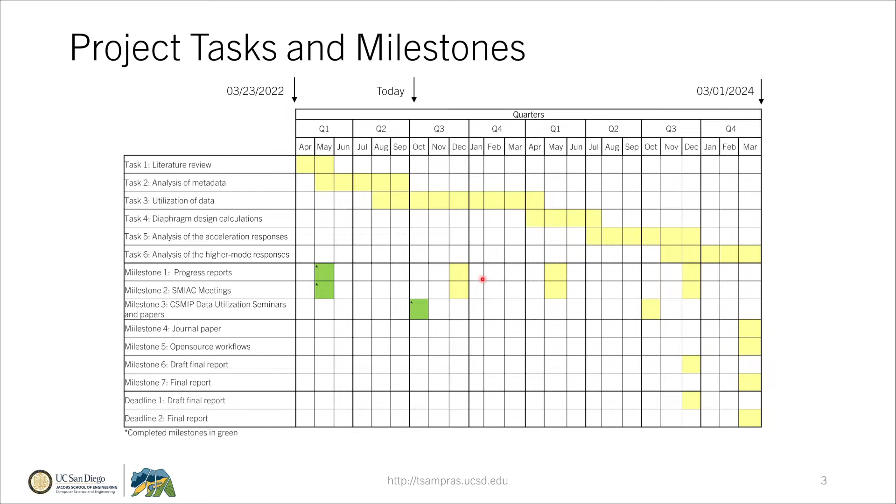We started working on this project on March 23rd, and in the past six months we have met with the building subcommittee. We submitted the report, received comments, and considered those, which I'll discuss as well. Today I'll give you an update on this ongoing project; all the conclusions are not final.

A little bit about the motivation: in conventional buildings, we expect the seismic-induced horizontal forces developing at the floor diaphragm level to be transferred through a seismic force-resisting system to the base of the building. Here I show an example, a structural wall building, where we expect to limit the first mode response by the formation of an inelastic flexural mechanism at the base. There is no way by design to limit the higher mode responses.

Here I show a well-detailed connection between a flat slab and a core wall, where these number 9 bars are essentially collecting the seismic-induced inertial forces developing within the diaphragm and transferring them into the plane of the wall. We typically design these connections to remain linear elastic and don't anticipate dissipating seismic energy there. However, during strong motions, due to displacement compatibility between the floor diaphragms and the walls or other structural systems, we should expect some damage.

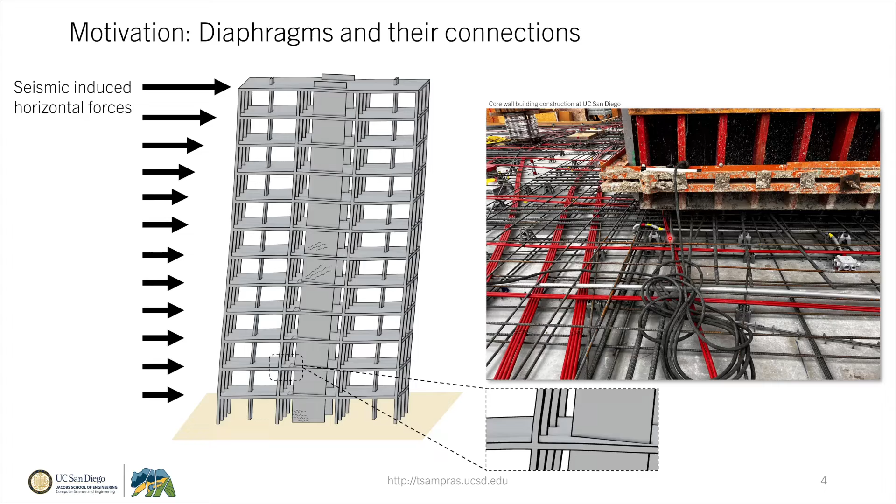In fact, this damage may even lead to total or partial collapse. Past earthquakes have shown structures like precast parking structures collapsed during the 1994 Northridge earthquake, or tilt-up wall buildings. More recently, in the 2010-2011 Christchurch earthquake, we observed collapses related to failures in the load path that transfers seismic-induced forces from the diaphragms to the seismic force-resisting systems.

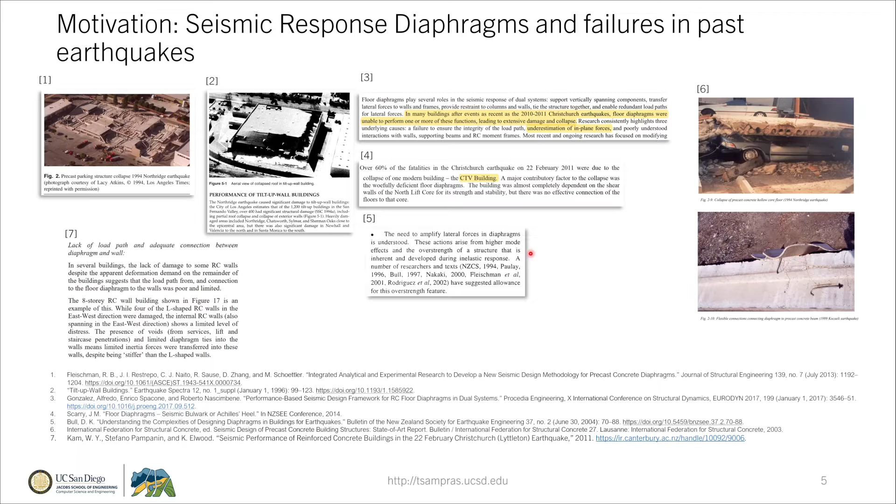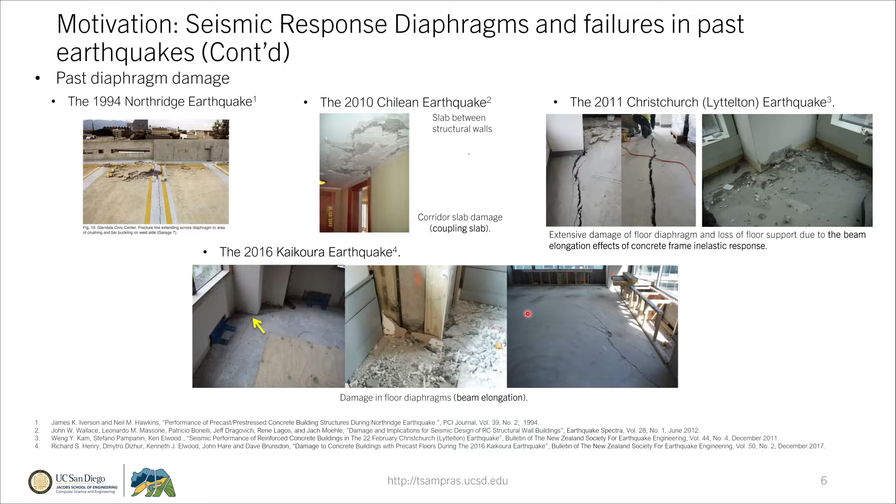These issues have been known in New Zealand for a long time, and researchers and practitioners have been working to solve them, especially how to quantify these forces developing in diaphragms and account for higher mode effects. This is not only related to collapse; the issue is also related to localized damage at the connection between the floors and other structural members.

As Brad mentioned, ASCE 7-16 and also ASCE 7-22 include an alternative method to design diaphragms, allowing us to take into account the second and higher mode responses that contribute to the total dynamic response of a building. This method was developed considering experimental results and numerical simulations. There is an opportunity to further validate this method, which is already an improvement, by utilizing the data available in the strong motion dataset.

I want to show a little bit about the database we have. There are several buildings that are actively monitored, and we already have available metadata associated with the type of building, the type of seismic force-resisting system, how many channels or accelerometers are installed in the building, and so on.

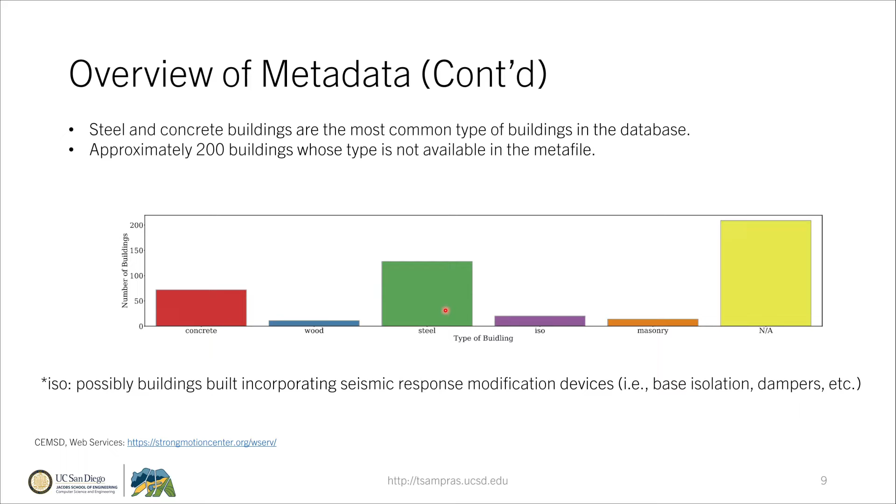Looking at the metadata, we can understand that the majority of the buildings are reinforced concrete and steel buildings, and the majority are between 2 to 5 or 6 stories high. Within this metadata, peak floor accelerations and peak ground accelerations are provided, so someone could quickly assess the amplification effects for each building that is actively monitored.

So at this point, we can say that we can utilize this information to further validate the seismic design provisions that were introduced in ASCE 7-16. And I want to take some time to describe briefly what these provisions are.

Essentially, they give us a tool to compute the seismic-induced diaphragm design forces, FPX, by utilizing the tributary weight at each floor level and the design acceleration coefficient CPX. The multiplication of the two results in an estimate of the seismic-induced horizontal forces, which is reduced by taking into account a reduction factor that considers the global ductility of the diaphragm system.

If we look deeper into this process, essentially we need to determine the seismic force resisting system that we will be designing, the building location and soil class, the risk category, and the number of stories. Then we can estimate the natural period, the fundamental period of the structure, and compute other parameters like the design acceleration coefficients, the modal participation factors, and eventually the design acceleration coefficients for diaphragms.

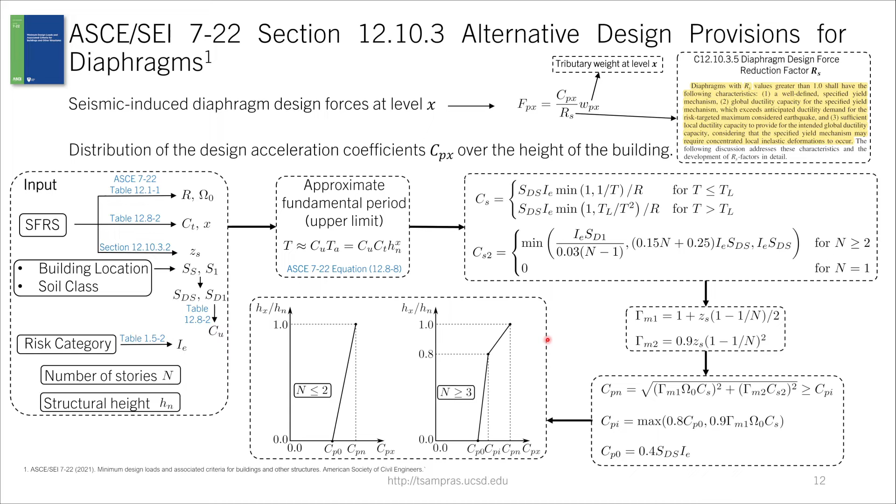On the upper 20%, we have a steeper linear variation that demonstrates this method does take into account the contribution of second and higher mode responses, which effectively affect mostly the upper 20% of the structure.

Now I want to start looking into some of the parameters used to compute this design acceleration coefficient for diaphragms, which will help us also select some criteria to establish the set of buildings that we will be using to do this validation within our workflow.

So first I want to look into the number of stories, which essentially will affect the fundamental period of the structure. As the number of stories increase, the period increases, and this will affect also our design spectral accelerations and the modal participation factors.

As you see here, if we plot the design acceleration coefficient with respect to the normalized height of the building, as we increase the number of stories, the design acceleration coefficients generally decrease, and they reach a lower limit here.

This is actually expected, because as we increase the number of stories, the period increases, so these design spectral accelerations do decrease, and their variation also decreases within that larger period range.

So this is expected. However, one thing worth noticing is that in the upper 20% of the height of the building, we still observe a significant amplification of the design acceleration coefficients, and this is because the higher mode responses are still significant.

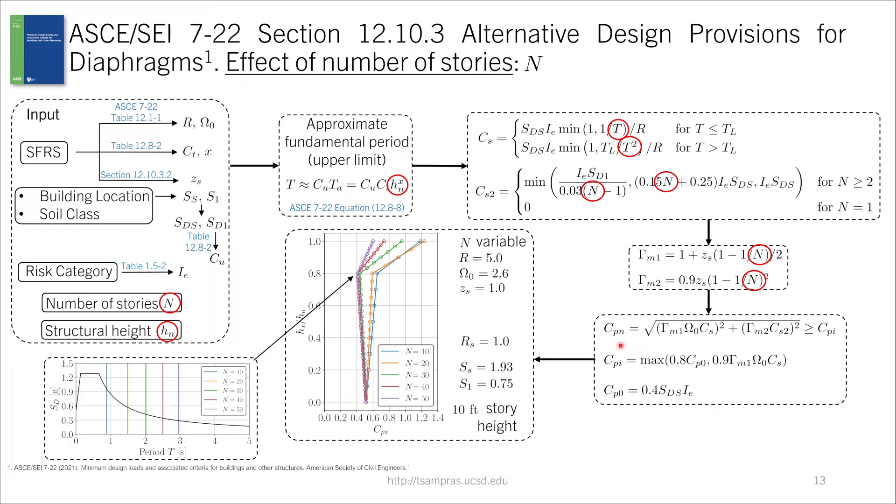Now, if we look at parameters associated primarily with the seismic force resisting system, we can focus on the seismic response modification factor and the overstrength factor. These are both parameters that affect the first mode response of the building.

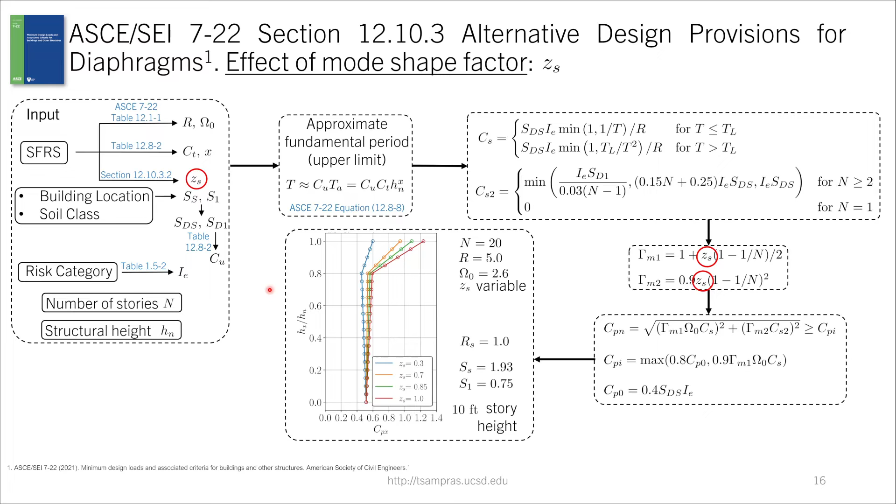Last, I want to look into the mode shape factor, which essentially tries to take into account how effective a seismic force resisting system is at reducing the second and higher mode contribution in the total dynamic response of the building. Here you can see that for a mode shape factor equal to 0.3, the distribution of design acceleration coefficients is fairly constant.

So we don't get significant amplification of the design acceleration coefficient in the upper 20%. This reflects that a building that uses, let's say, a buckling-restrained brace frame as the seismic force resisting system is able to mitigate the higher mode responses.

So all these things are reflected within this design code, and that makes it a very improved method in order to estimate the seismic design forces in floor diaphragms.

So having these parameters in mind, we can broaden our horizon and look at the criteria we need to take into account while selecting buildings for our validation. Related to the structural response of buildings is obviously the date of construction, because that determines the structural detailing and design criteria selected at that time. The number of stories also matters.

This determines the seismic response, the location, the seismic risk category, and the seismic force resisting system. There are some additional criteria, like how many channels or accelerometers we have installed in the building, and what is the spatial distribution of these channels. Do we have enough sensors within a floor plan, and are they well distributed over the height?

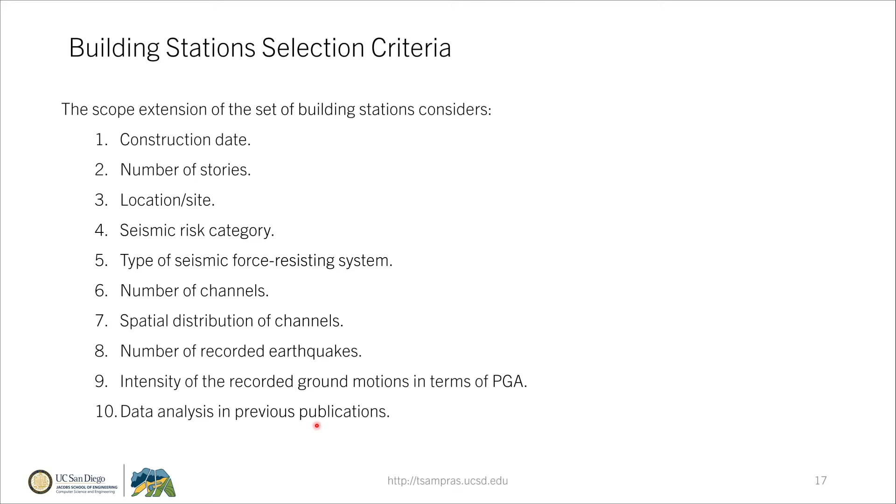The number of recorded earthquakes and their intensity at a building station is also important, because we would like building stations with a larger number of earthquakes occurring during the period the building was instrumented, and buildings that have seen earthquakes resulting in significant peak floor accelerations. Lastly, it would be nice to work with buildings previously studied, because that enhances the available metadata we can work with, and considering the long history of the seismic instrumentation program, this is something we need to take into account.

So for this preliminary study, up to this point, over the past 6 months, we were able to come up with a subset of building stations and seismic events. The criteria we selected for now were buildings taller than 12 stories, with maximum peak floor acceleration greater than 0.2g, and belonging within the California Geological Survey network, because this network typically provides more metadata related to the buildings. This resulted in 14 building stations, each of which may have more than one seismic event meeting our requirements, so we have essentially 20 unique combinations of building stations with seismic events. We call them analysis cases, and they are listed here.

As part of this project, we eventually hope to extend the scope and include more buildings with different numbers of stories, in order to better understand how the actual response of buildings compares with the design provisions. So having a subset of buildings led to the next step: developing a framework to do all the computations required in the study.

We decided to use Python, an open source programming language, to develop this framework. The first module in this framework allows us to compute the design acceleration coefficients. Essentially, we took the data and metadata already included in the strong motion database that is publicly available, and we tried to identify the parameters associated with the design procedure and append these parameters within the existing database.

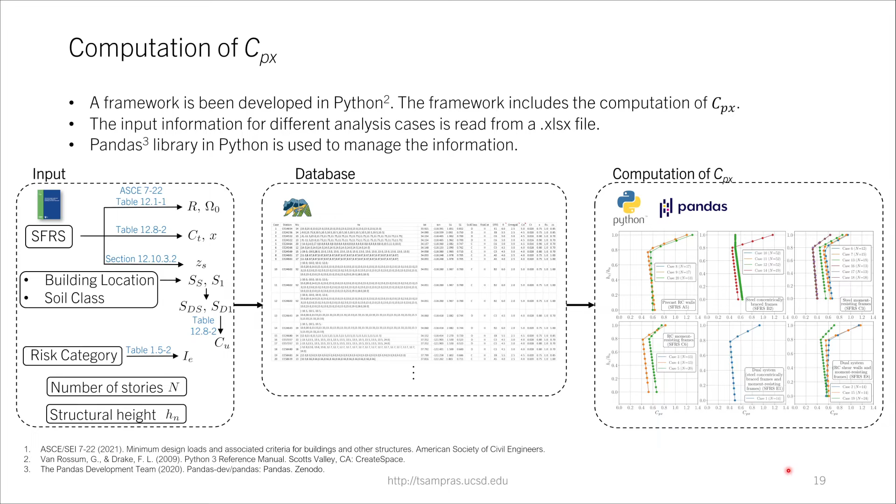Having done that, we can develop a module to perform the computation of the design acceleration coefficients for all the building stations included in the database. This is an example of a plot associated with these computations. Now, having the design acceleration coefficients solves one part of our procedure.

The other part, obviously, is the response of the selected building subjected to given earthquakes. In our study up to this point, we decided to compare the design acceleration coefficient CPX with peak floor horizontal translational accelerations. That means we needed to compute a relatively accurate estimate of the location of the center of rigidity, in order to decompose the horizontal translational components of the acceleration from the torsional components.

The location of the center of rigidity in a structure depends on the distribution of the vertical elements of the seismic force resisting system, but also depends on the intensity of the ground motion the building has been subjected to in the past, because some nonlinearity may result in differences in the location over time.

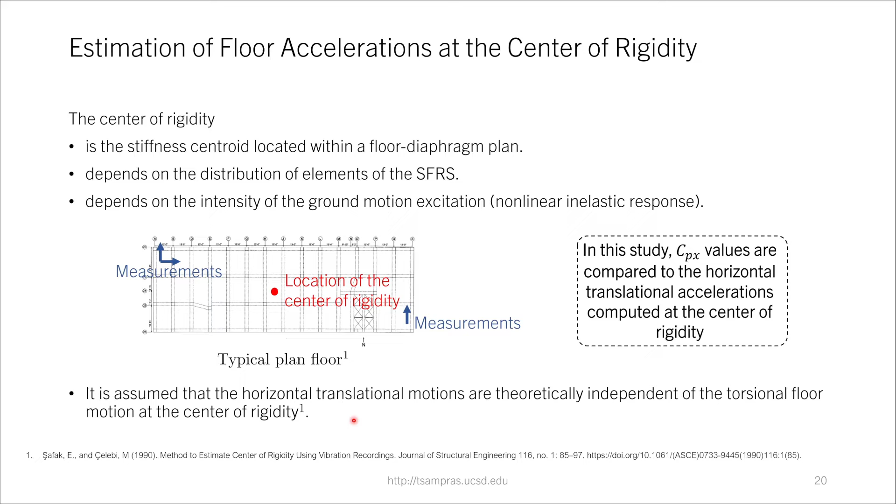So that meant we needed a way within our workflow to compute the location of the center of rigidity. We looked in the literature and found that Safak and Celebi published a paper in the Journal of Structural Engineering where they estimate the center of rigidity using acceleration data. The main assumption was that at the center of rigidity, the horizontal translational motions are independent from the torsional motions. I'll spend a little time describing this procedure developed by Safak and Celebi, which we used in our workflow.

Essentially, this method requires at least 3 measurements of motion at 2 different locations. For instance, in this schematic, P and Q are the two locations. We have a recording of motion in the X global direction and Y global direction at point P, and a motion recorded in the Y global direction at point Q. With that, Safak and Celebi expressed the rigid body translations in the X and Y directions and the torsional rigid body motion.

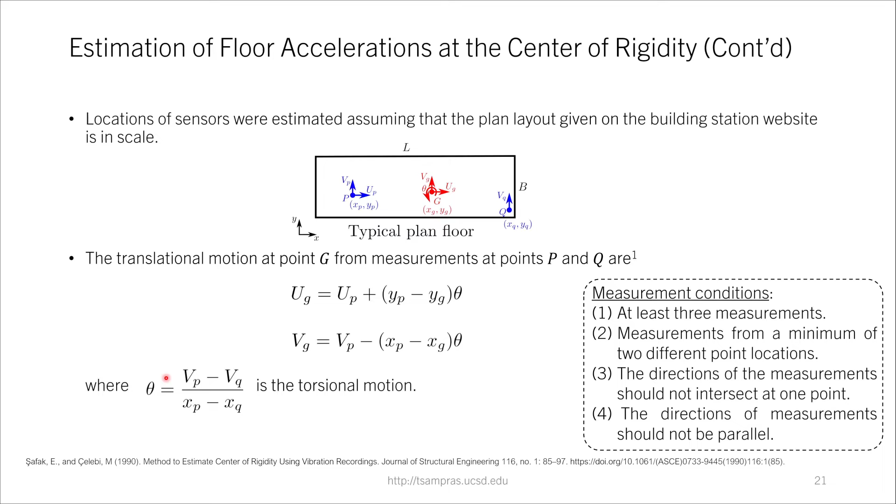Now, the next step is to compute the best estimate of the center of rigidity. In this paper, you can find that statistically you can use the cross-correlation between the horizontal translation along the x-axis with respect to the torsional rigid body motion. This cross-correlation has to be 0 in order to get an estimate of the x-coordinate of the center of rigidity. The same applies for the y-coordinate, where the cross-correlation of the y rigid body motion with respect to the torsional response has to be 0.

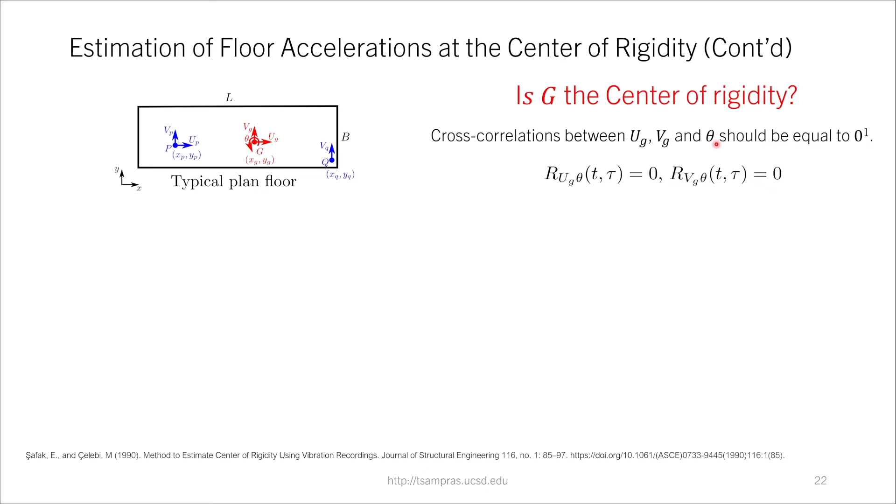However, Safak and Celebi stated that this is rarely possible when working with real data. So they propose that instead of setting these to 0, we try to minimize these functions. If we want to work in the frequency domain, they stated we can use the coherence function, which is basically another statistic metric in the frequency domain. To eliminate the issue of different frequencies, they propose minimizing the area under the coherence function, which is the integration over the whole frequency range.

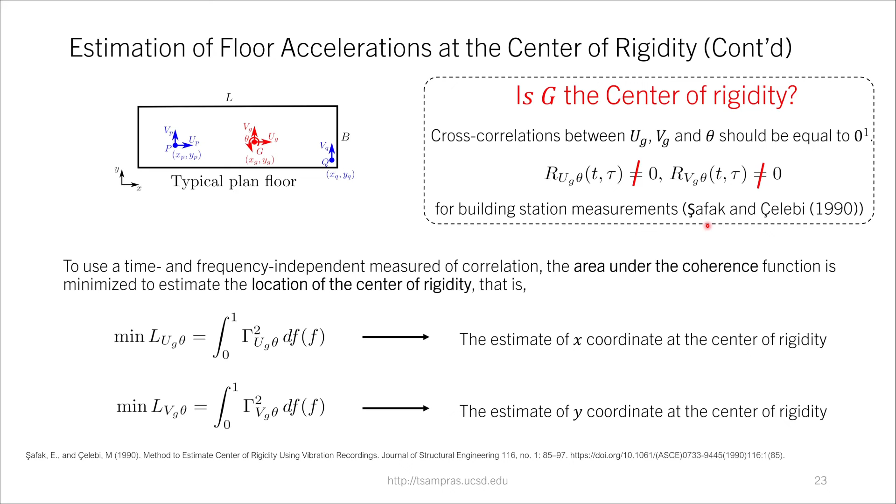This method gives us an approximate estimate of the x and y coordinate at each floor level where we have enough information in a building. So we took that method, and after validating it with information provided by Dr. Celebi and his colleagues, we implemented it within our workflow.

So we started again from where we left off, with our database from the strong motion instrumentation program plus the information related to the design acceleration coefficient. Then there's a module where we compute the estimate of the center of rigidity, and we expand this information into our existing database.

This information more specifically includes the X and Y estimates of the center of rigidity for each floor where we have enough information, and for each ground motion, because, as we said, the center of rigidity may change with respect to the ground motion we have.

That allows us to do a comparison by having the horizontal translational accelerations over the height of the building and comparing them with the design acceleration coefficients. This also gives us the opportunity to look at the torsional response independently and the superposition of the two, which is something we're interested in doing in the future as part of the higher mode effects.

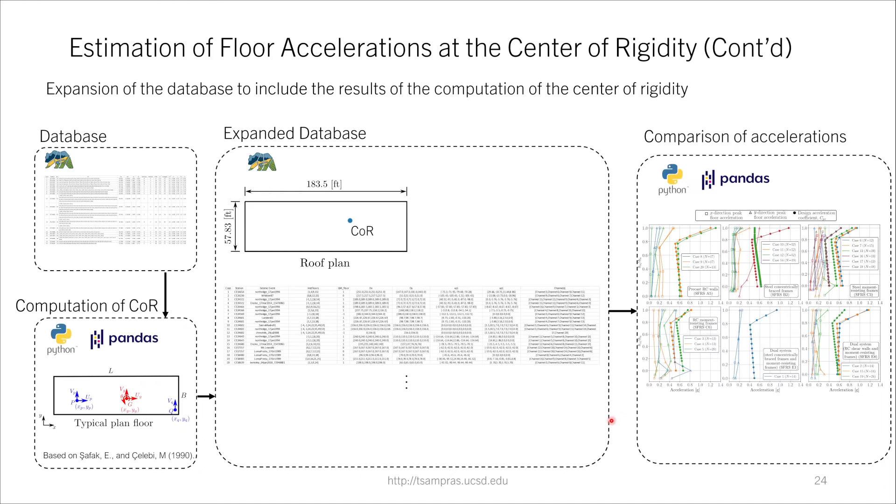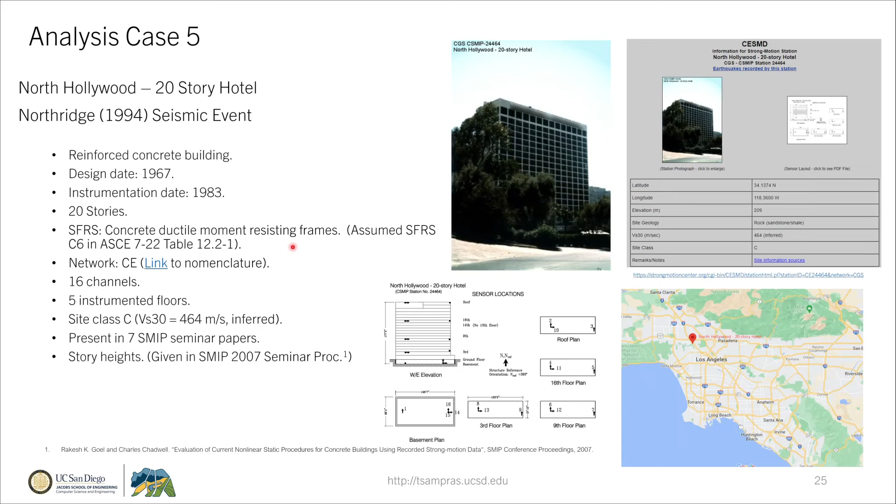I want to show two examples of implementing this procedure. Analysis case 5 involves a 20-story building subjected to the Northridge 1994 earthquake. This is a concrete ductile moment-resisting frame. You can see that by computing the coherence area, we can find where it's minimized and get the best estimate for the x-coordinate of the center of rigidity.

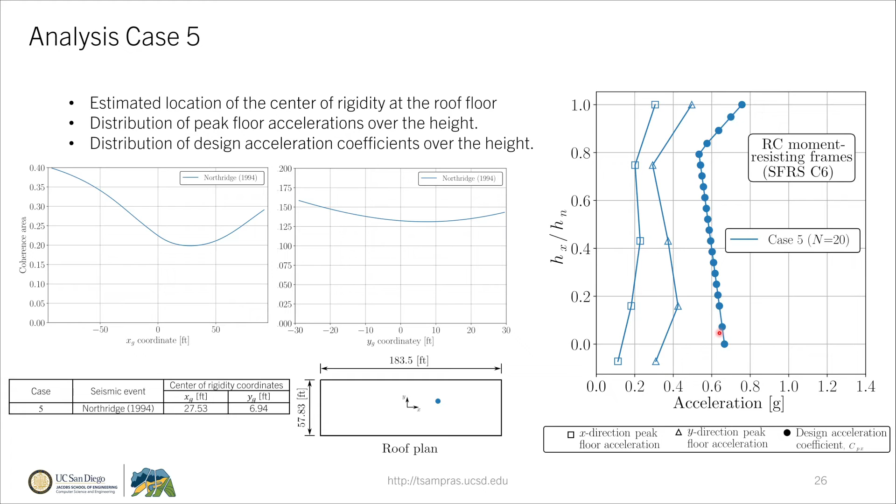We can do the same for the y-coordinate, and then decompose the accelerations and compute the peak floor accelerations over the height in the x and y directions, comparing them with the design acceleration coefficients.

Another example is analysis cases 10, 11, and 12, a 52-story building subjected to 3 ground motions. We assume this is a concentrically braced frame.

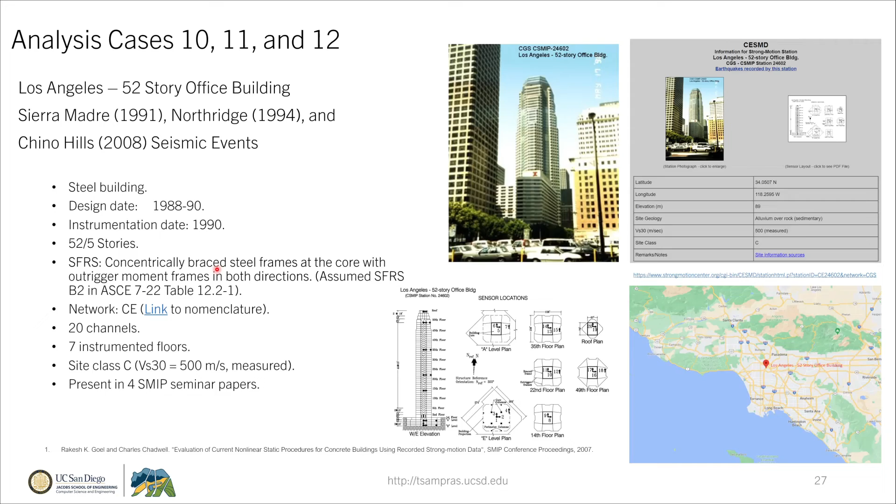The interesting thing here is that with this method, you may observe some variations in the best estimate of the center of rigidity. For instance, the Sierra Madre earthquake data resulted in an x-coordinate position different from the computation using the other two earthquakes, which may imply some small nonlinearity that occurred during the Sierra Madre earthquake.

Having this workflow so far, we're able to run the computation through all the buildings within the subset, which we're planning to expand later, and make a comparison.

These three analysis cases are special in that they include buildings with potentially vertical irregularities. ASCE 7, in the commentary, states that buildings with vertical irregularities must have special treatment and more sophisticated analysis to get a best estimate of the design forces for the diaphragms. So this is consistent so far with what we've seen in this very early study.

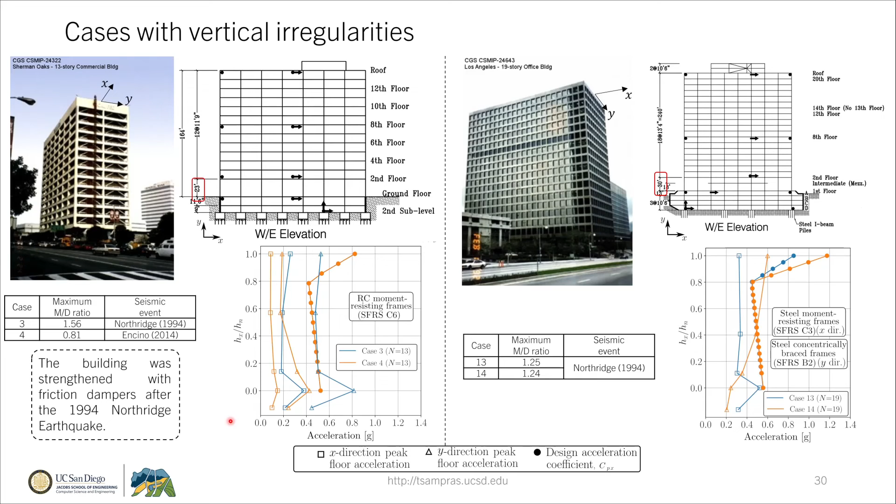I want to summarize by saying we've been developing this workflow, and so far we have a way to compute the design acceleration coefficients and the decomposed peak floor accelerations in the horizontal, translational, and torsional modes.

And we haven't found yet a building that has been instrumented and subjected to relatively strong motions that has exceeded the design coefficients, except for those buildings that have vertical irregularities. In the future, we will try to expand the number of buildings to account for more floors and types of seismic force resisting systems.

Also, based on suggestions from the meetings that we had with the building subcommittee, we will look into comparing the design forces coming from the previously existing design method, which is based on section 12.10.1, that does not take into account the higher mode effects.

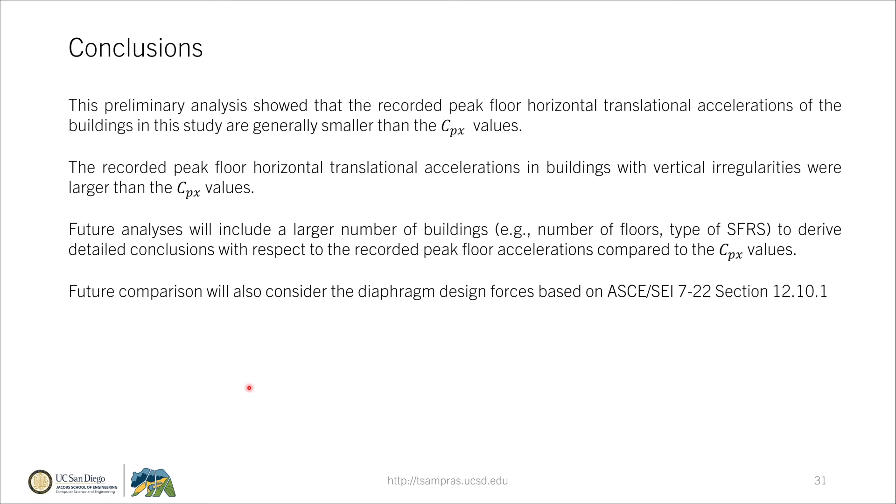Thank you very much, Professor Tsampras. I don't actually see any comments yet in the log, so let me ask one myself. If you go back to the measured versus predicted, those M over D ratios, I just want to make sure I'm understanding this.

The measured values are from actual strong motion records. Is that correct? This is correct. So that's the numerator, and the denominator is what you would predict for what the design value in the building code would be at that site.

That is correct. Okay, so these earthquakes are small earthquakes, right? There aren't any design earthquakes in the subset. So wouldn't you always, unless something really odd is going on, expect these values to be noticeably lower than 1 because you're not comparing apples to apples?

Yeah, that's exactly right. And also we don't even include the torsional induced accelerations. But so far we just wanted to compare the data because in the database, this is what we have available. So that's why we want to expand the database to account for more buildings that potentially have been subjected to stronger ground motions.

Yeah, I think you're not going to find too many. That's the classic problem we have. What I would think you might want to consider is the reverse: you have the PGA of these recorded values, so you might want to scale down the design value to be equivalent to as if it were in a smaller hazard zone, and then compare that with what was actually recorded. That might be a little closer to an apples to apples comparison. Obviously nonlinearity plays a big part, and you won't capture that, but I think it's worth investigating.

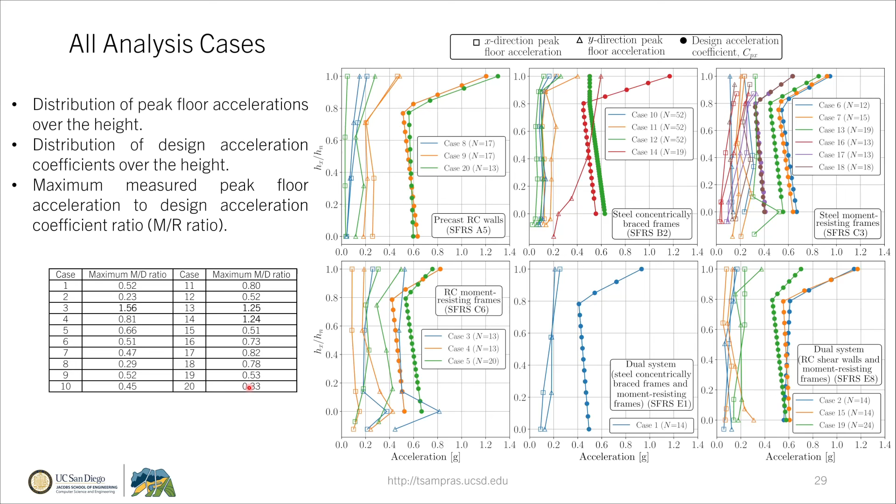I think another thing, you had a nice thorough discussion of what's available in the set, and then you indicated what your selection criteria were. And in the end, you've focused on mid-rise to high-rise buildings where you would think there would be higher mode effect influence, but that's a small subset of the total population of buildings out there, right? I mean, the majority of buildings aren't anywhere near this tall.

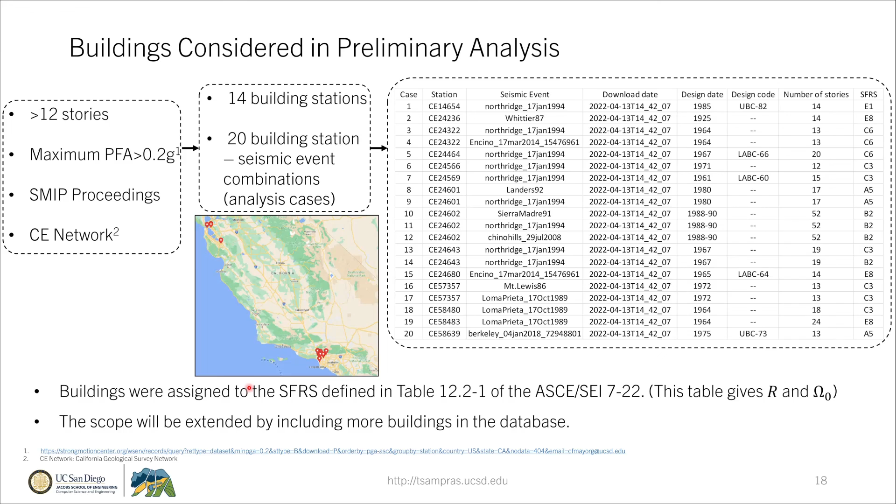So you might want to think about, as you go farther, picking smaller buildings. They certainly have higher mode effects, and even 12.10-1, the shape implied by the 12.10-1 provisions was intended to account for higher mode effects. That's why it's not a triangle, it doesn't have the whipping effect at the top that the alternate procedures do, but it has a bigger one at the bottom. So that would be of broader interest, I think, to the practicing community if you captured some of those smaller buildings.

I agree. And at this point, over the past 6 months, we wanted to make sure that we have a relatively accurate workflow and validate all the steps along the way, so that we can easily expand by adding buildings of interest and run this computation. That's why the number of buildings we saw today is limited, because we are developing the workflow, and then we will expand it and make sure the results are correct. So we'll definitely work with shorter buildings as well.

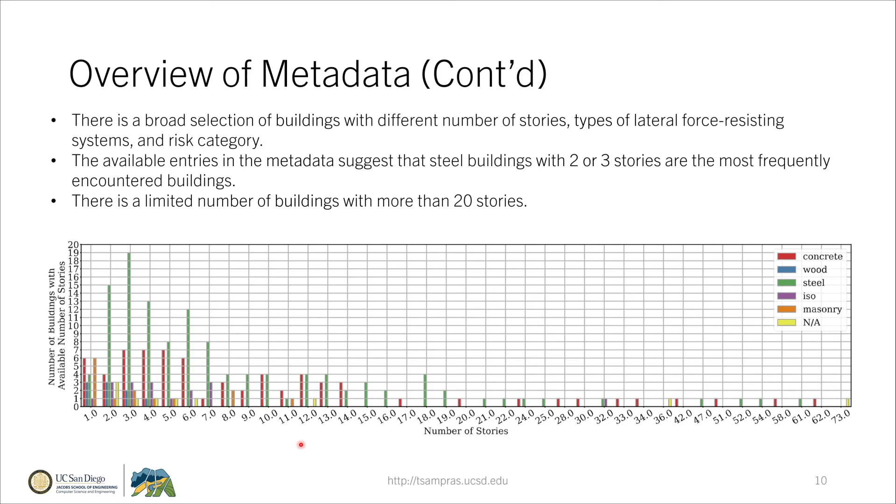So we kind of hit the time limit. I don't see any additional questions, but let me thank you for a nice, clear presentation. Obviously a very organized approach that your folks are taking. So that looks good, and I wish you the best of luck as you keep going.